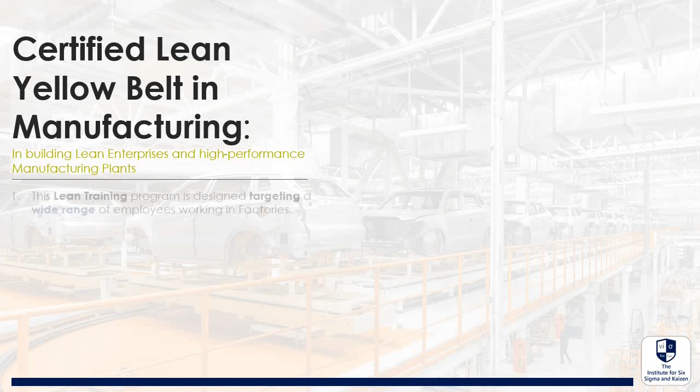Welcome to this program. This lean training program is designed targeting a wide range of employees working in factories. The content of this program is designed to be aligned with ASQ, BQF and other leading quality bodies, and is designed to be highly effective with all manufacturing sectors.

After you complete this program, we have provided you the option to obtain your official yellow belt certificate. This is how your official certificate offered by us will look like.

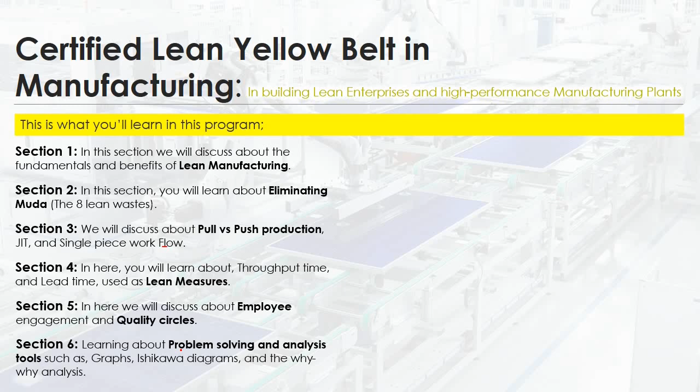This is what you will learn in this program. In section 1, we will discuss the fundamentals of lean manufacturing. Then we will discuss eliminating the 8 forms of Muda. Then we will discuss push versus pull production, then JIT and single piece workflow. Then you will learn about throughput time and lead time, then employee engagement and quality circles. Then you will learn about problem solving and analysis tools like different types of graphs, Ishikawa diagrams, and the why-why analysis. Then you will learn about Kaizen and Six Sigma, and then we will discuss the 5S or 6S system and about Gemba walk. Finally, we will show you how to take the yellow belt exam and obtain your certification.

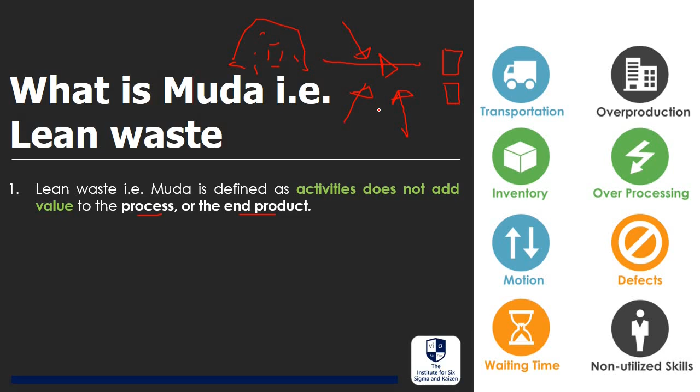These non-value added activities are a cost to the organizations. No one wants to pay for these.

And there are 8 forms of lean waste or Muda. These are the 8 forms of lean waste. And we will learn about all of these in our coming slides.

Now, we should know that still there are activities such as quality inspection which add no value to the end product, but it is really needed in manufacturing. Therefore, this won't become a Muda.

Now, the first form of Muda is Muda of transportation. Transportation involves the movement of finished products, then inventory or work in progress. So simply the movement of the physical goods. Now, this movement could occur within the plant or between plants. Therefore, Muda of transportation is simply the excess movement.

Now, with this example, we will try to understand this. The production illustration of IRK aviation is shown below. Components made from plant 1, plant 2 and plant 3 need to be transported to the assembly plant. It is assumed that it requires $2 per kilometer. Calculate the total cost associated with transportation.

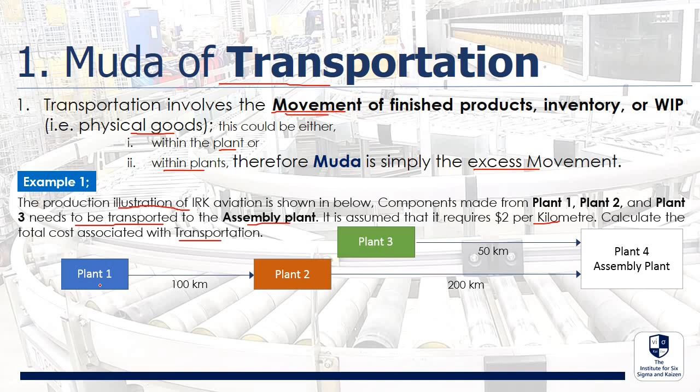So now we have plant 1, plant 2 and plant 3. Components made from these plants need to be brought here. If we calculate the total transportation requirement, 100, 200 and 50, the total becomes the sum of all of these three values. So it is 350 kilometers. Now this 350 should be multiplied by $2. Then we will get $700. This is the cost associated with transportation.

End of the day, we need to add this to the end product, and we need to always try to bring this down. Value stream maps are used to identify Muda of transportation, and we will learn more about this in one of our coming lessons.

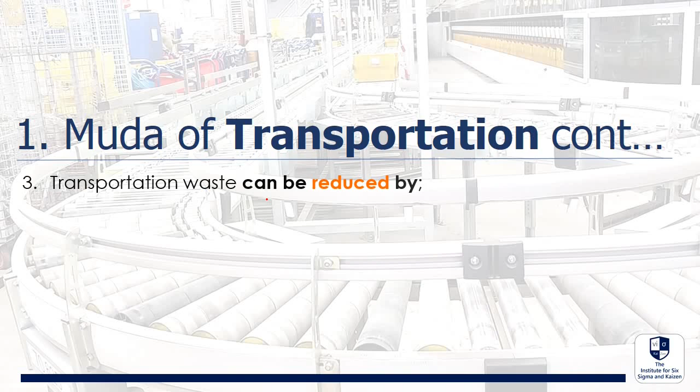Transportation waste or Muda of transportation can be reduced by relocating plants, so bringing the factories closer. That's where you find manufacturing cities or industrial zones. Then changing the plant layout. We will learn about this also later. Then making a process change, so changing the manufacturing setup. About that also we will learn later.

Then changing the inventory setup. We can maintain a small storage facility near the production area. Likewise, there can be many ways to reduce the Muda of transportation. In many situations, we cannot make Muda of transportation zero, but we can try to reduce it.

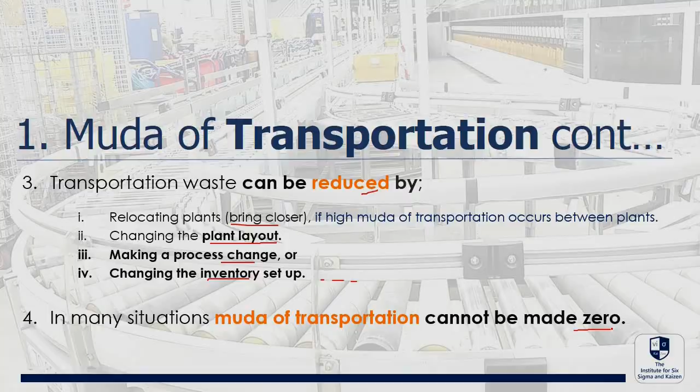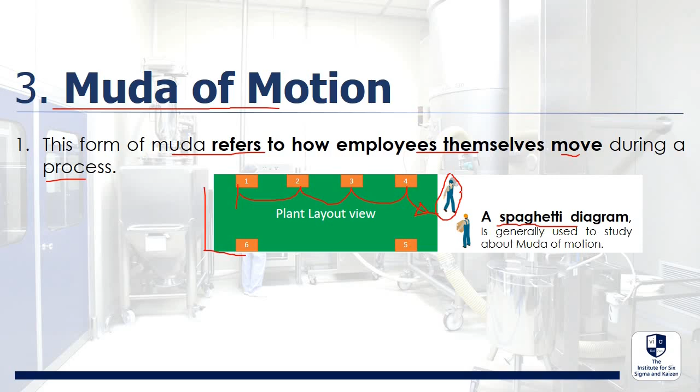Then comes Muda of motion. This form of Muda refers to how employees themselves move during a process. Let's say this is the plant layout and the movement of the employees. To study the movement of employees within the plant, we will use spaghetti diagrams, and you will learn more about this in one of our coming lessons. Simply, this is the excess motion or movement of mainly the employees in the factories. Motion is often relevant to people-powered processes seen in the production flow, in the warehouses and with material handling.

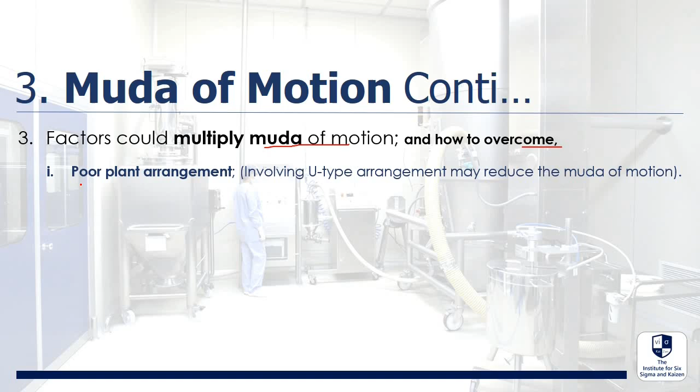Factors that could multiply Muda of motion and how to overcome them. The first one is poor plant arrangement. So let's say if the employee needs to move between machines 1 to 4 frequently, this is sometimes called vibrant motion, and will lead to a high amount of Muda of motion. Therefore, we could reduce this with the U-type arrangement. So he or she can easily access any machine.

Then, the second one is inconsistent work methods or no SMPs, standard manufacturing procedures. To overcome this, we need to design the SMPs.

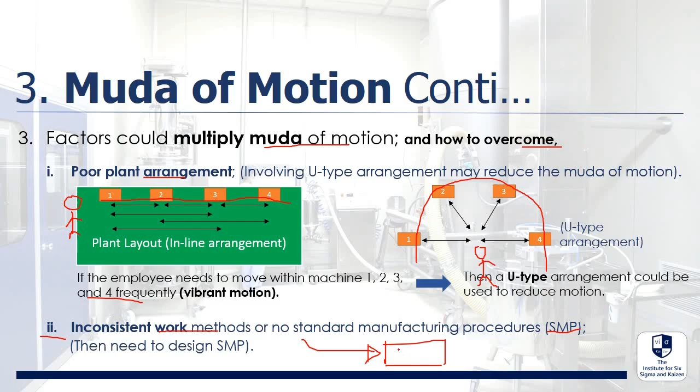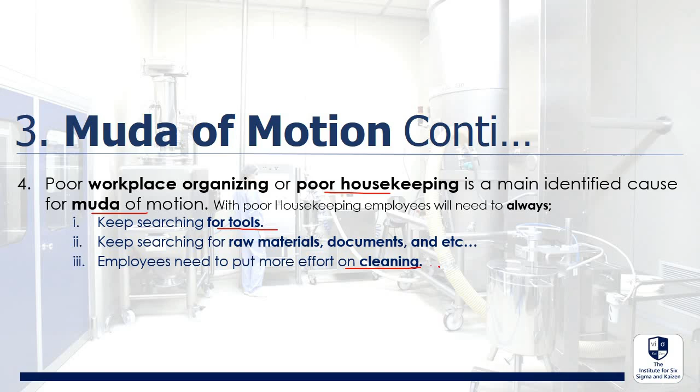Then, poor workplace organizing or poor housekeeping is a main identified cause of Muda of motion. Poor housekeeping will lead the employees to always keep searching for tools, raw materials, documents and other things. And employees will need to put more effort into cleaning, and there could be many things like this.

Therefore, the 5S method is a proven method that helps improve workplace organizing, and this will result in reducing Muda of motion. We will learn more about 5S and how this could be done under the 5S section. That's all for this lesson. Now let's move to the next part.

This is the second part of the previous lesson. Then comes Muda of waiting. Muda of waiting refers to any idling time or idling process, either for machinery, people or the work in progress. So let's say process 2 and process 3 are ready, but process 1 is not ready. Maybe some technical issues, and the technical department is not properly informed. So because of this, the employees and the machines in process 2 and process 3 will need to wait.

Machines or people working below capacity will lead to a high amount of waiting. Let's say process 1 and process 3 are operating normally. Then the process 2 operator is working very slowly. Then we will see small amounts of inventory piling up here. Process 3 will not have work to do, and the speed of process 1 will need to be reduced.

Generally, waiting occurs when intercoordination fails, the coordination within departments or with the suppliers, and also if the processes are unreliable.

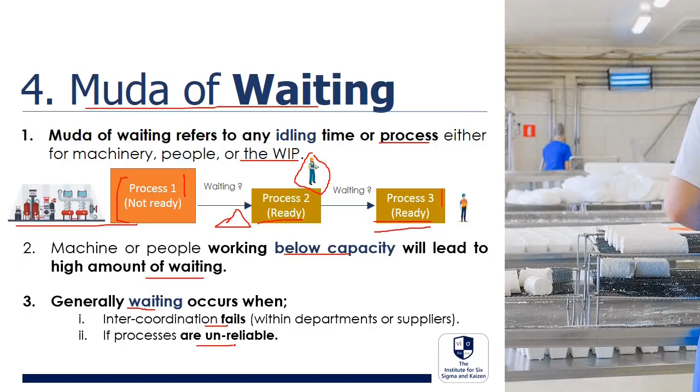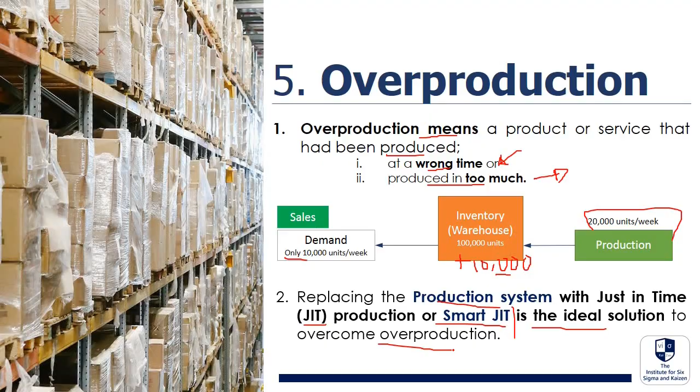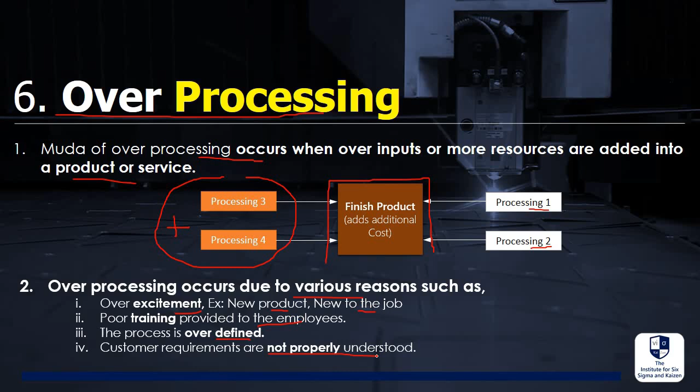That's all for this lesson. Now let's move to the next part. This is the third part of the previous lesson.

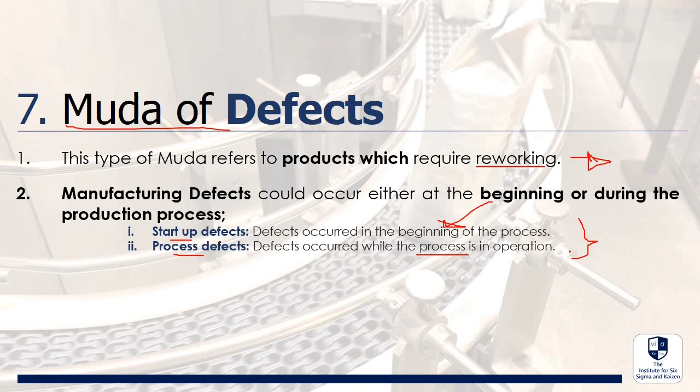Reworking will require additional time, additional material and additional labor. It is a cost to the organization. One of the main objectives of Lean Six Sigma or manufacturing excellence is to minimize defects occurring.

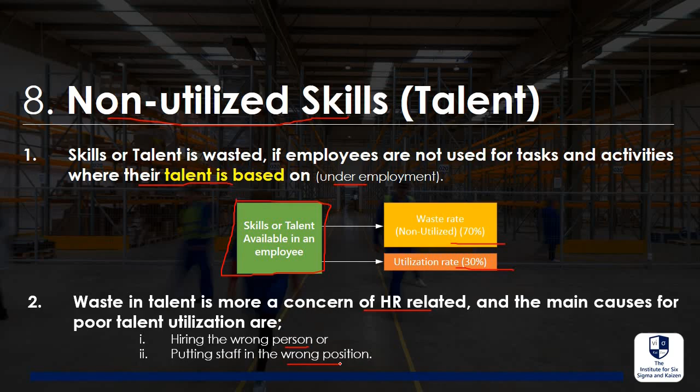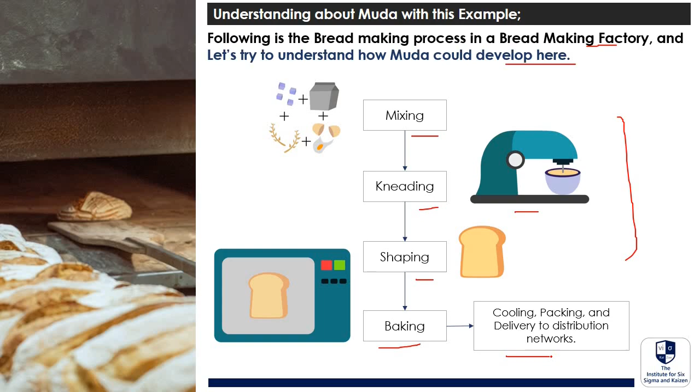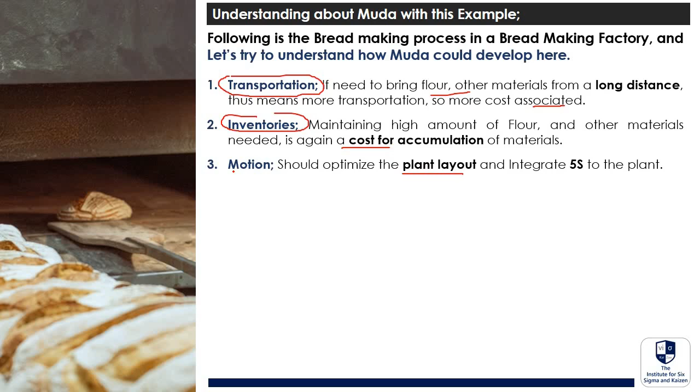If we need to bring the raw materials from a long distance, then this means more transportation, so more cost associated. This means Muda of transportation. If we need to maintain a high amount of raw materials, it is again a cost, so Muda of inventories. If the plant is not properly optimized, then we will see Muda of motion. If the production cycles are not properly balanced, or if the production is poorly planned, then we will see Muda of waiting.

Producing above the daily requirement will result in Muda of overproduction. Over-processing, meaning over-baking or maybe over-mixing, will lead to a defective product. Defects could form in different stages of the process, and we need to identify them. Quality control plays a vital role here. And if we did not use the right employees, it will result in non-utilized skills.

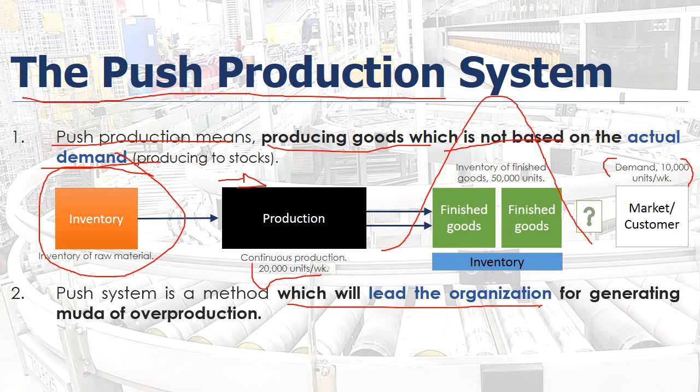The push system is a method which will lead the organization to generating Muda of overproduction. Then push production will always lead to high operating cost because it is needed to maintain a high amount of inventory. It goes both ways: inventory of raw material and inventory of finished goods.

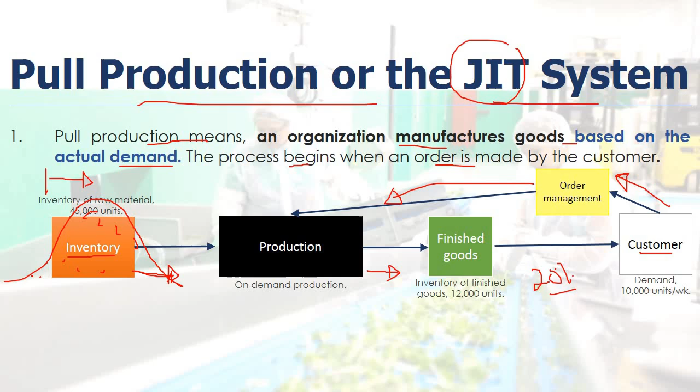Based on the demand or the production pattern, a decent amount of inventory is maintained. This is always done to prevent any kind of JIT failures. Then JIT will result in reducing the operating cost due to the optimized inventory management. This is the concept of producing the exact quantity of the right part at the right time.

Now we will learn about single piece workflow. In this method, a product is processed in one stage and then moved to another stage, which is again followed by the other products. Let's say this is our first processing stage and this is the second one. And if this is the starting point, initially we need to take the raw materials or the work in progress and process it under processing stage 1,

and then this work in progress will be moved to processing stage 2, and then after the value is added, it will be moved to the next processing stage. This is how this method works. It is a continuous flow. In every processing stage, some value is added to the work in progress. This is how it works with the garment industry and in vehicle production lines.

Let's say in the body production line, in every workstation, some value will be added to the product. Maybe some parts are welded, then maybe some parts are fixed, then maybe the doors will be fixed, then maybe the windshields will be fixed, and likewise. Step by step, value is added to the end product. This is how it works with the chassis assembly line.

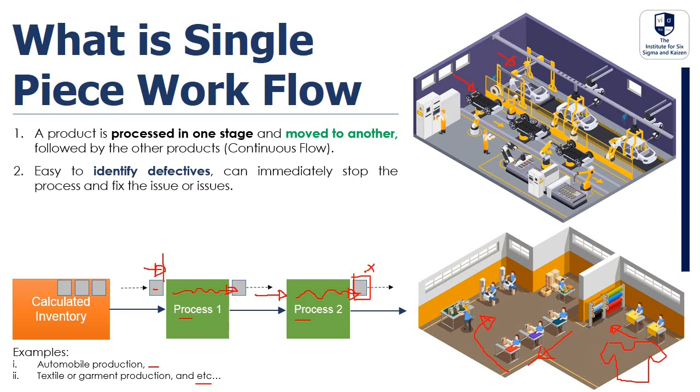And about this example, you will learn very deeply under our work study sections. Now, with this method, it is easy to identify defectives. Let's say in process number 2, something went wrong and we noticed a defect in this product. What happens is, we can stop the process immediately and fix the issue. In this case, maybe we will need to rework only one product.

Then the third one is that parts are moved through the process with little or no waiting time at an optimal rate. We will learn more about this under the cycle time section later. With this method, we will not see additional inventories piling up, or we will not need to maintain a high amount of inventories of raw materials, as it is not adopting the batch approach, where you will be producing plenty of goods at a time. This is simply the approach of continuous manufacturing.

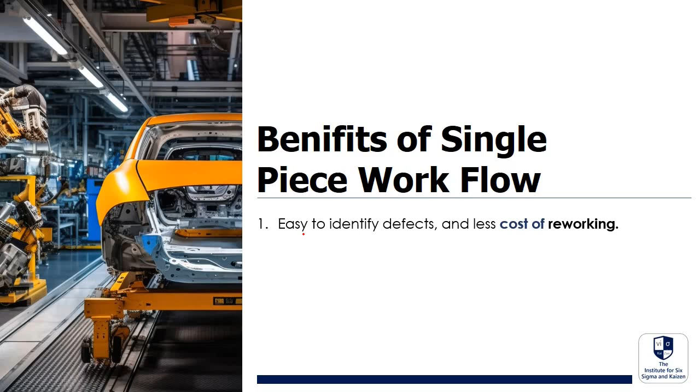The benefits of single piece workflow. The first one is easy to identify defects and less cost of reworking. As we saw previously, only the first product undergoing some defective processing will need to be reworked.

Then it reduces the inventory levels. Then less space is required. Mainly due to less inventories and less work in progress, and due to the optimized flow, we will require less space to work.

And it reduces the complexity of the job. In this method, the work will be divided into many sub-processes or operations. Therefore, the employees will not be stressful, and because of this, we can reduce the cycle time, which you will learn later, and enhance the manufacturing flexibility.

In this method, usually we can customize every sub-process. Let's say a customer wants to manufacture 1000 shirts, and all of them should be white color. And from this order, if they want only a few shirts to have red color pockets, maybe 10 shirts, this can be easily done.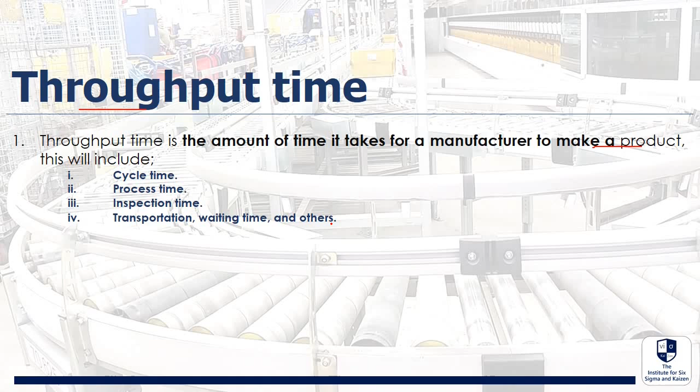Now we will learn about the throughput time and the lead time. Throughput time is the amount of time it takes for a manufacturer to make a product. Simply, it is the time taken to produce a product. This time will include the cycle time, the process time or processing time, the inspection time, the transportation time, waiting time, and other time values associated with manufacturing the product.

It is simply the time required for a product or a work in progress to move from the beginning to the end of any sequential process. This means the time required to produce any product in any sequential or operations which is mainly in series.

The equation to calculate the throughput time is the total of the cycle time, the process time, then maybe the loading time, then maybe the waiting time, inspection time, transportation, and likewise.

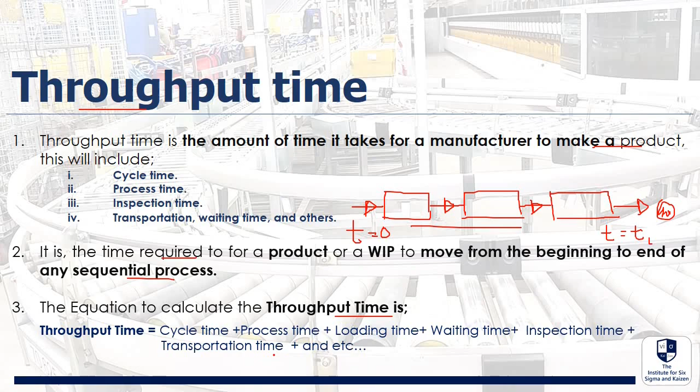Now, with this example, we will learn more about this. A factory is in need of calculating its total throughput time. Therefore, they have computed the following values. Calculate the total throughput time. They have given us some time values: the transportation time, the waiting time, the inspection time, and likewise. So, how to calculate the total throughput time?

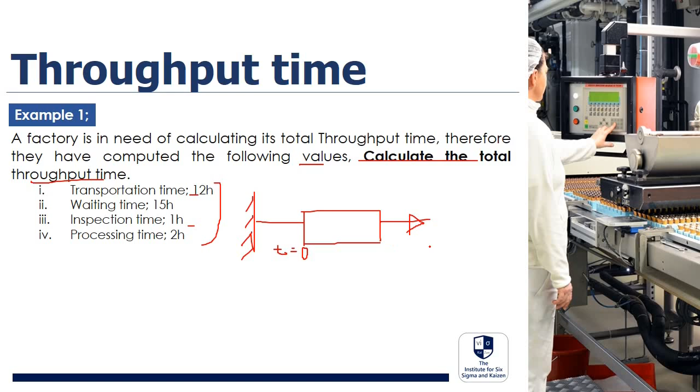We need to assume that these are the total time values required for this process from time 0 to the end. The total throughput time is the total of all these values. If we add all these, we will get 30 hours.

Now comes lead time. Lead time is known as the amount of time taken from the moment a customer places an order to the moment the product is delivered or received by the consumer. Let's say there is a series of processes in producing the product.

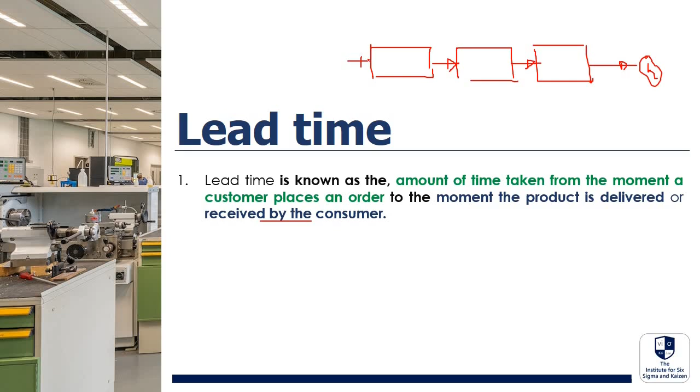Let's say we have finished the product to a certain amount and we maintain a small inventory here. Now let's say when a consumer places an order, if we will need to just pick the semi-finished product from here and do some processing and then deliver it to the consumer, then the lead time is only the time taken for this process.

Always we need to stick with this definition: the amount of time taken from the moment a customer places an order to the moment the product is delivered. And we will be needing this definition to solve different examples in our coming lessons.

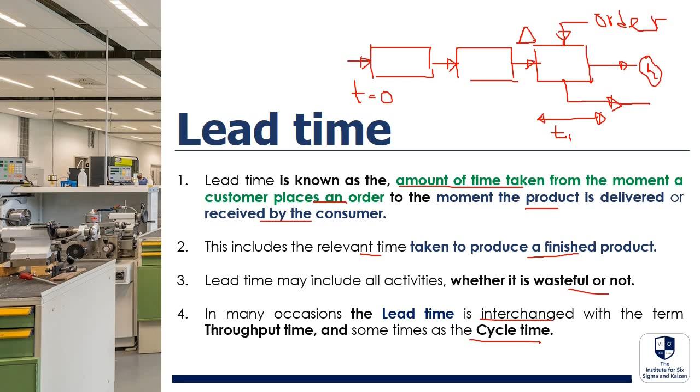Now, this includes the relevant time taken to produce a finished product. If this is the finished product, the time taken is T1. Lead time may include all the activities, whether it is wasteful or not. In many occasions, the lead time is interchanged with the term throughput time and sometimes as the cycle time. Now you will understand more about this in our coming lessons.

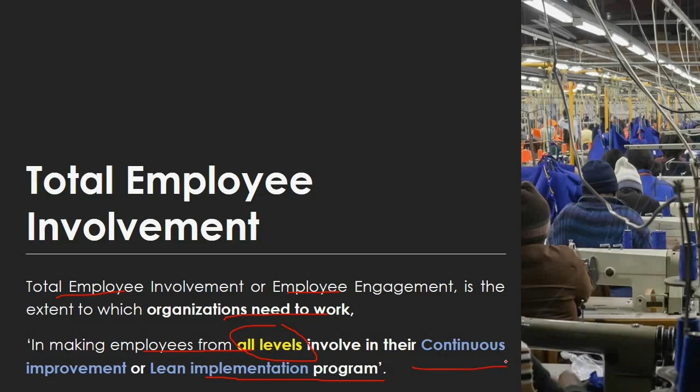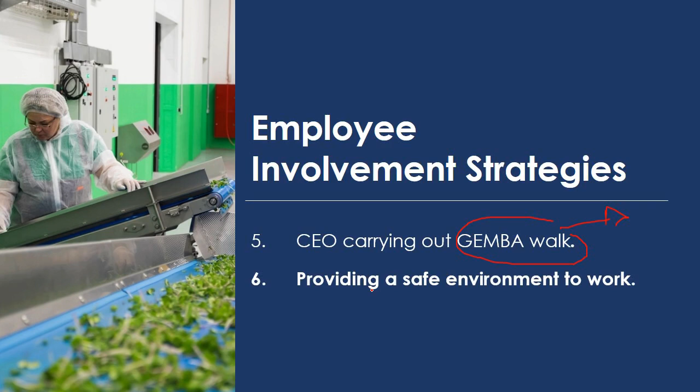Then the CEO should frequently meet the employees and communicate with them. This concept is known as the Gemba walk. Then we need to provide a safe environment for the employees to work in. Then we need to authorize employees to form groups among similar categories and solve their own problems.

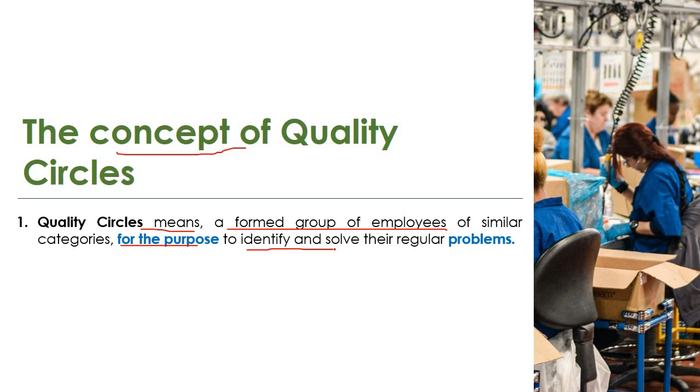This is the concept of quality circles, which you will learn in the next slide. The concept of quality circles: a quality circle means a formed group of employees of similar categories for the purpose of identifying and solving their regular problems. How do we understand this?

Let's say we have a plant with 3 different sections: Production Section 1, where there are 100 employees; Production Section 2, where there are 120 employees; and the Maintenance Section, where there are 50 employees. Now, a quality circle can be formed for Production Section 1, maybe involving 10 employees. Likewise, in all sections, quality circles could be formed. Then these employees could get together and solve their regular problems.

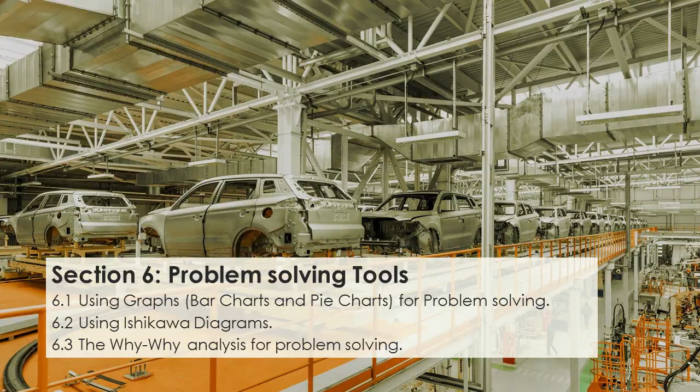Now we will learn about data representation with bar charts and pie charts. Data representation mainly refers to how data could be displayed in a simple form. That is the idea of this, and there are many methods that can be used for this purpose. In this lesson, we will be talking about bar charts and pie charts.

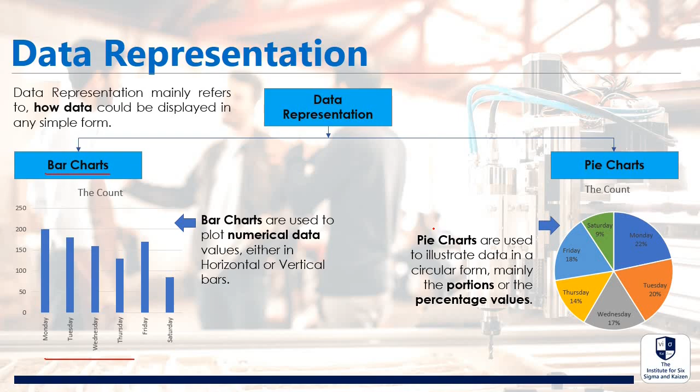With this example, we will learn how to plot these charts. A wooden sunglass manufacturing company produces 4,000 sunglasses a week, Monday to Friday. Usually they find a high amount of quality rejects, around 8 to 10% of total production. At the end of an average week, the QC team classified the defectives as follows. Now plot a bar chart and a pie chart using Excel.

Now, this is a company that manufactures wooden sunglasses like this. And here we have the defect classification, with 6 types of defects or errors. This is for a randomly selected average week.

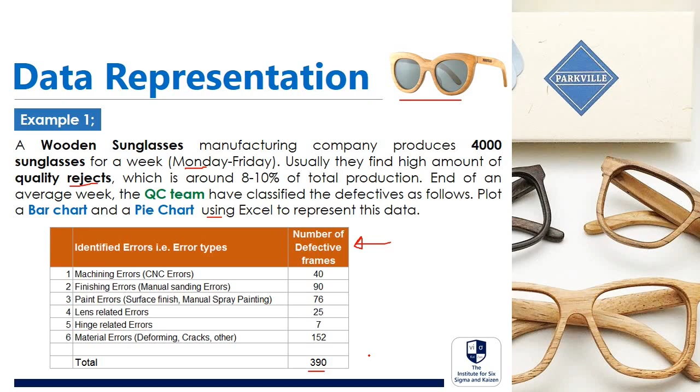Now we have created this table in Excel, and there are 6 identified errors or defect types. Normally, these frames are made involving CNC machining. The wood is cut to shape, and then comes the finishing process, mostly done manually, and then the frame is assembled and packed.

Now here we will see the highest number of errors are due to material errors. We know this is wood, and wood will crack or deform, and plenty of issues can happen due to the use of wood.

Now we will see how we can plot the bar chart. Initially, we need to select this area. Then go to Insert, and click the Insert Bar Chart column. In this case, we will select this type, a clustered 2D column chart. Now we have everything we need here, and as soon as we look at this, we know material errors are giving the highest number.

Now, if we want to plot the pie chart, again we need to select the data, then go to Insert, then click the Insert Pie Chart icon, and select this type. Now we can change the format of this. We can easily find out that up to 39% of the defectives are due to material errors.

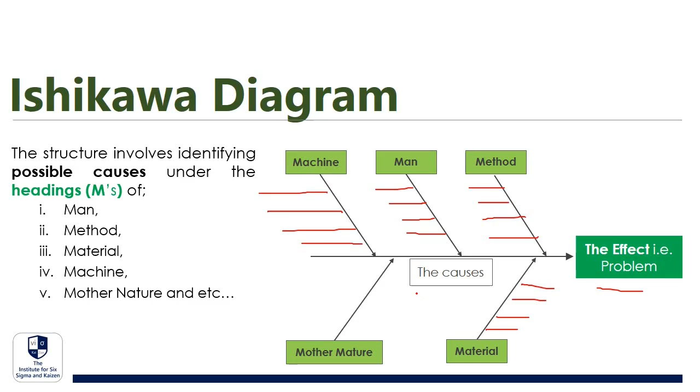Depending on the scenario, we can use maybe 4 M's, then 5 M's, then 6 M's, or even more. This means the headings. If we have more headings, the depth of the analysis will increase.

With this example, we will learn more about Ishikawa diagrams. ABC Plastics is a company producing PET bottles. It is identified that the productivity is always low and the plant operates slow, far below the design speed. This has led the company to higher operating cost, high defect rate, poor product output rate, and poor profit margins. Hence, the management hired a lean consultant to identify the causes and address such issues. If it was you, prepare a cause-effect diagram identifying possible causes.

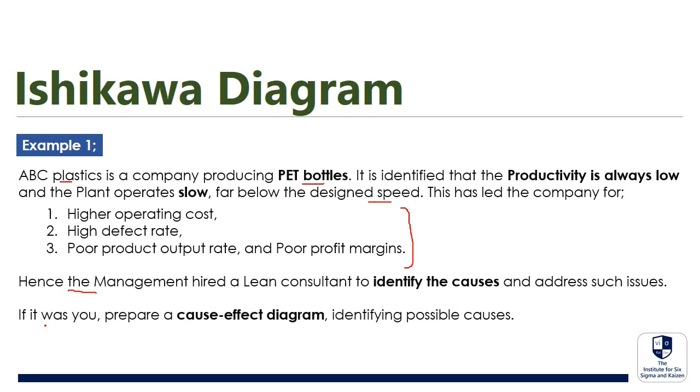Let's say under man, this means the employee factor. So under this, we can find poorly trained employees, lack of skills and knowledge, poorly motivated employees, and high employee turnover rate. Now, all these 4 causes will lead to poor productivity.

Under method, this means related to the manufacturing process. The first one becomes poorly planned production sequence, meaning no heijunka, then plenty of muda of overproduction, then no SOPs, meaning no standard operating procedures, then no 5S, and likewise. Again, these causes are identified under method for poor productivity.

Then if we consider material: using low quality or cheap raw materials, poor material storage conditions, improper inventory management system, and likewise.

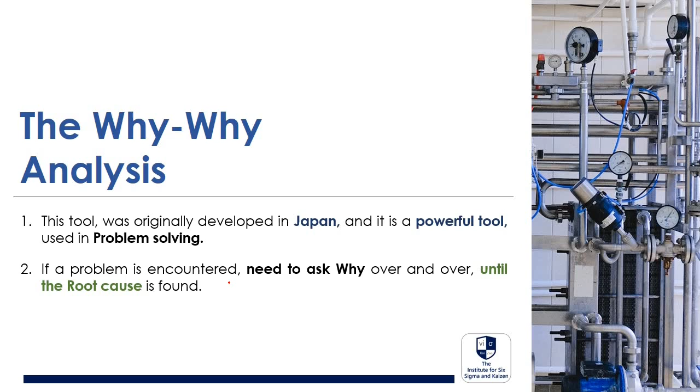If a problem is encountered, we need to ask why over and over until the root cause is found. Using 5 whys for this is the most common way, and that's why sometimes we call this the 5 Why analysis. But still, the number of whys depends on the situation.

Sometimes we will find our root cause in maybe 3 whys. Sometimes we will maybe need to go until 6 or 7 whys.

With this example, we will see how to use the 5 Why analysis. ABC Plastics is a company producing PET bottles. It is identified that the productivity is always low and the plant operates slow, far below the design speed. Now let's see how to find out the root cause using the 5 Why analysis.

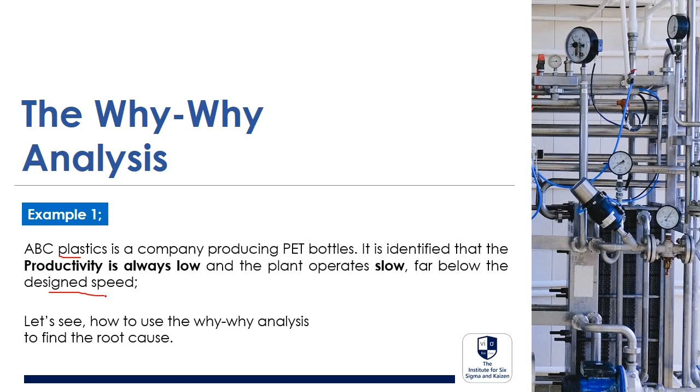Now when we come to the answer, the first question that needs to be asked is: why is the productivity low in the production line? The answer for this question is due to frequent equipment breakdowns. The first question should be based on the problem, and the second question should be based on the answer of the first question.

Now it becomes, why does equipment frequently break? And the answer for this question is due to failures in the hydraulic systems.

Now the third question is, why do hydraulic systems fail? The answer seen in the factory is due to failure in the control valves, meaning failure in the inner valve parts. Now a hydraulic system will use plenty of control valves.

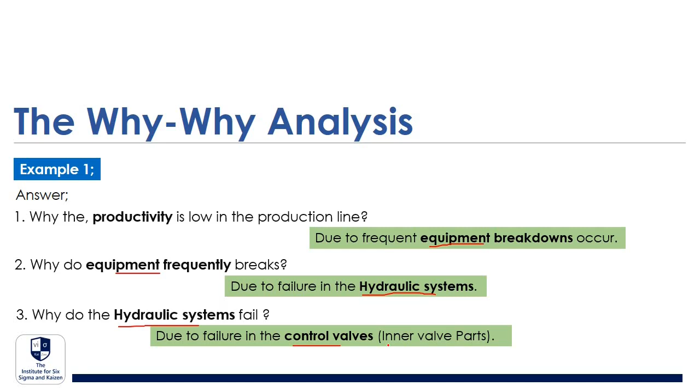When electricity is provided to this solenoid assembly, a magnetic force is generated and it will pull or push the shaft, and that's how the valve will function. Now when we take this shaft, there are many oil seals and washers, and that's how we prevent oil leakage.

Therefore, sometimes the shaft might get stuck, there may be oil leakages, there may be pressure drops, or the clearance between the shaft and the bore may be high. Therefore, these are some of the problems you will find in a control valve like this, and here it is simply referred to as the inner valve parts.

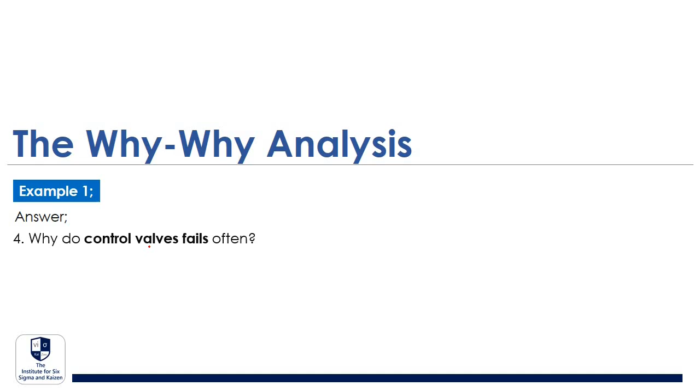Then the fourth question is, why do control valves fail often? The answer is, because they were not OEM recommended, and those are low quality spare parts.

The fifth question is, why were low quality spares purchased? The answer for this question is due to less funds allocated for spare parts. Now this is the main problem here. There are less funds for maintenance, or maybe the funds allocated are not sufficient. Therefore, we need to allocate more funds to purchase high quality or OEM recommended spare parts.

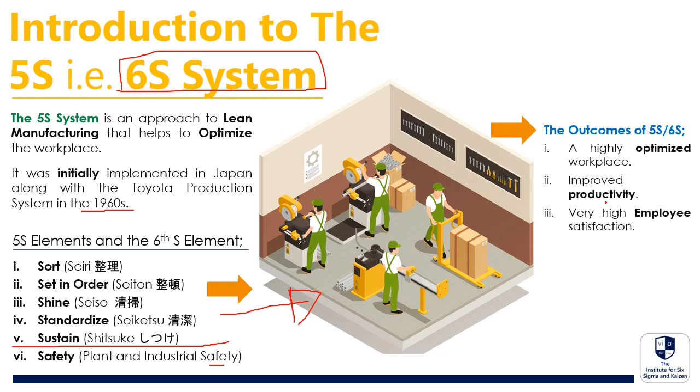Now, what are the outcomes of the 5S or 6S system? The first thing is we will be getting a highly optimized workplace. Then we can achieve improved productivity, then very high employee satisfaction, a highly organized working culture, maybe with SOPs and standardized information, and likewise. And then we can achieve a safe workplace.

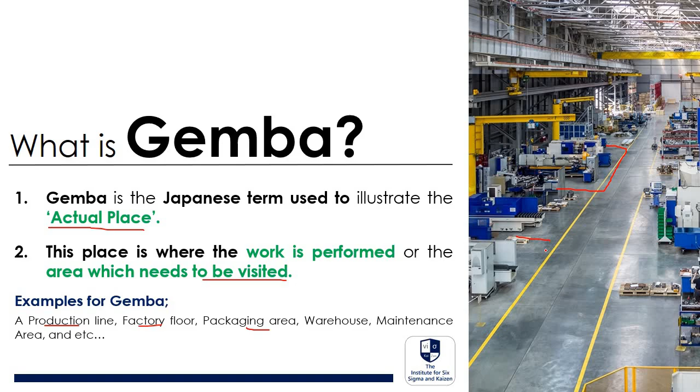In this lesson, we will learn about Gemba and Gemba walk. What is Gemba? Gemba is the Japanese term used to illustrate the actual place. Gemba means it is a place. This place is where the work is performed, or it is the area which needs to be visited. Examples could be a production line, the factory floor, the packaging area, or a place like this. So it could be any place.

Now let's talk about Gemba walk. The Japanese term for Gemba walk is Genchi Genbutsu. Gemba walk means go to the place and see what is going on. Simply this means go to the place, meaning going and visiting the areas. We will talk more about this in our coming slides. The management or the lean experts should practice Gemba walk. This is where opportunities for continuous improvement are found.

The elements of Gemba walk: the main objective of Gemba walk is to go to the place and see. This should be done by the decision makers, like the managers, the lean experts, or someone like that.

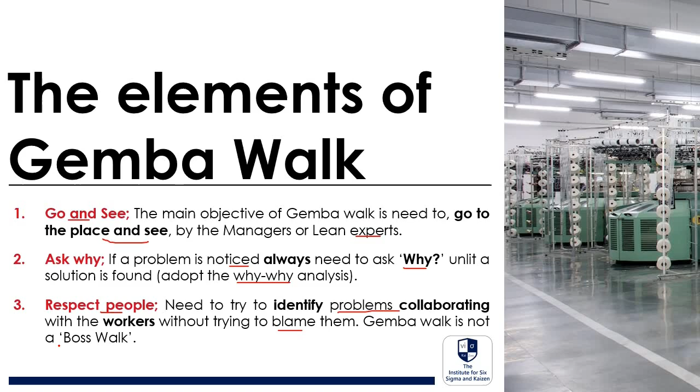If a problem is noticed, always need to ask why until a solution is found. We need to ask why from the immediate level workers. This is the concept of the why-why analysis. The third element is respect for people. We need to identify problems in collaboration with the workers without trying to blame them. There is no blame game here, and Gemba walk is not a boss walk. So if you are a manager, you need to get down to the machine operators' level when you want to talk with them.

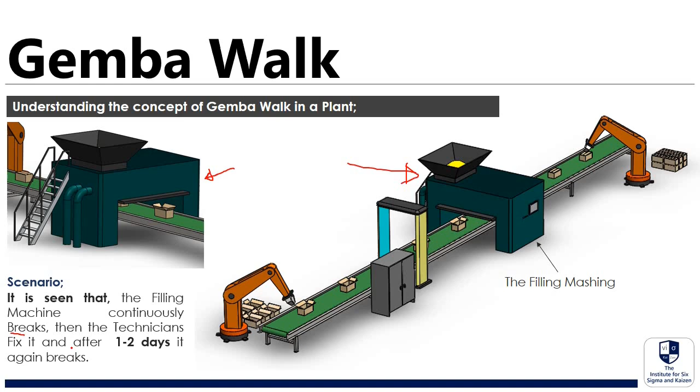Now let's see how this Gemba walk concept works. Let's say we have a production line like this, and it is seen that this filling machine continuously breaks. The technicians fix it, but again after one to two days, this machine breaks again. So let's say this is the plan view of our production line, and this is the filling machine. The maintenance engineer never gives the real reason why this machine fails frequently.

Because of that, the lean manager decided to go near that machine and ask the machine operators for the real reason. It was found that the problem is with the filling cylinder system, and the maintenance team uses very cheap parts to repair the machine. But they claim they use the best ones and charge for more cash, and afterwards they share that money. The lean manager was able to find the real reason because he went to the production floor and met the machine operators.

The benefits of Gemba walk: the first one is the ability to gather first-hand information. The managers or the lean experts can talk with the employees directly or see the scenario directly and make their own conclusions. They don't need to rely on somebody else's report.

The opportunity to interact with the employees leads to increased employee engagement. The employees can directly talk to the management and maybe even discuss their own problems without following the long protocol. This also provides the opportunity to identify areas for continuous improvement.